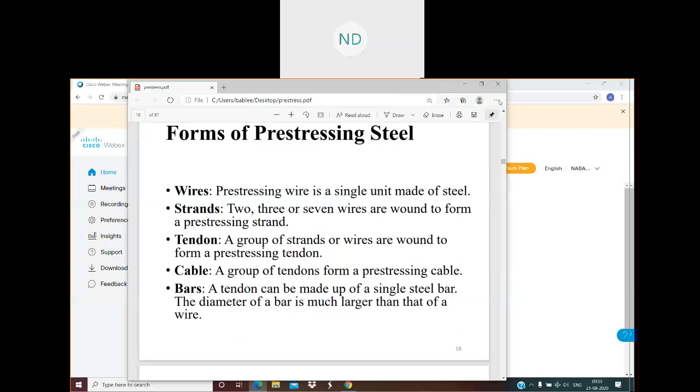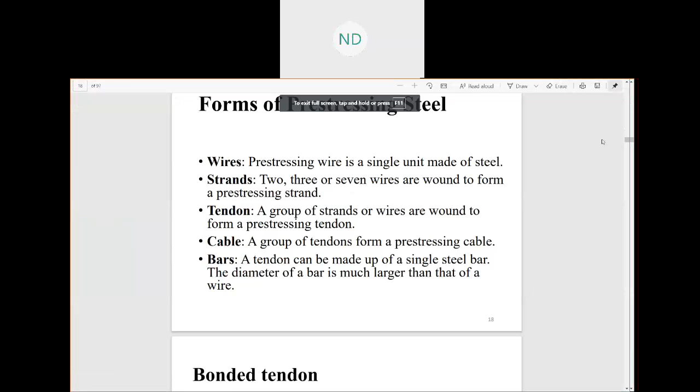So I think last class we have done with forms of pre-stressing steel, the tension, pre-tensioning, post-tensioning, tendons. Last thing we discussed was forms of pre-stressing steel, what are the tendons which we are going to use in our pre-stressing concrete, right? This we have discussed, forms of pre-stressing steel.

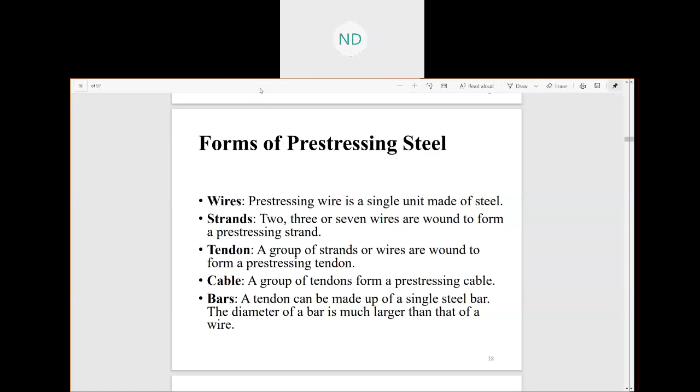Now, if we go to the advantages of pre-stressing, today we'll see what are the advantages of pre-stressing. Here it is mentioned sections remain uncracked under service loads.

As I told you in the last class, RCC structures - since concrete is weak in tension, at the bottom of the beam you will see cracks during service loads after the concrete has taken all the tensile stresses it could take, and furthermore could not take, since concrete is very much weak in tension. So we have seen cracks, but in pre-stressing, since they are very much strong, we use pre-stressing tendons and perform the pre-stressing process, so that they can have higher strength, especially in tension, so that they can carry more tension as well as compression. That's why sections remain uncracked under service loads in most cases.

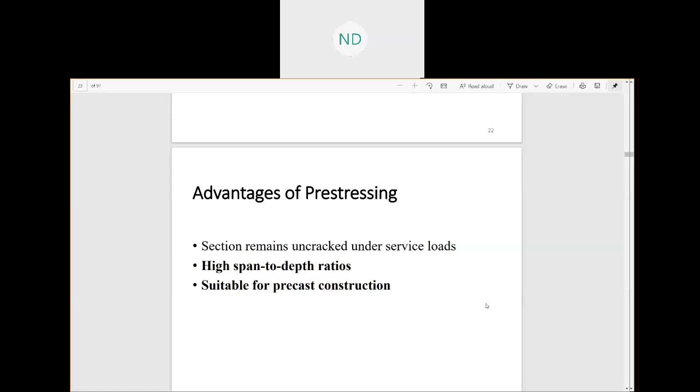Now if we come to the limitations of pre-stressing, what are the limitations? Pre-stressing needs skilled technology, because we are very much familiar with RCC, but not familiar with pre-stressing much here in India. Now it is done in some places wherever it is required, but it needs precision, and therefore we'll need skilled technologies, hence it is not as common as reinforced concrete. I think you people will understand if you go through this once.

The use of high strength materials is costly. In pre-stressing, the tendons used are very much high strength steels, so they are higher in cost compared to steel rods. Also, since in pre-stressing we use larger span to depth ratios...

So obviously when you're using pre-stressing, the amount of concrete used is more, your tendons used is more, and therefore your cost is higher, because the grade of concrete you use is also higher, since we are taking this pre-stressing method. Why? Because of the higher loads and higher span to depth ratio. So obviously the cost goes higher.

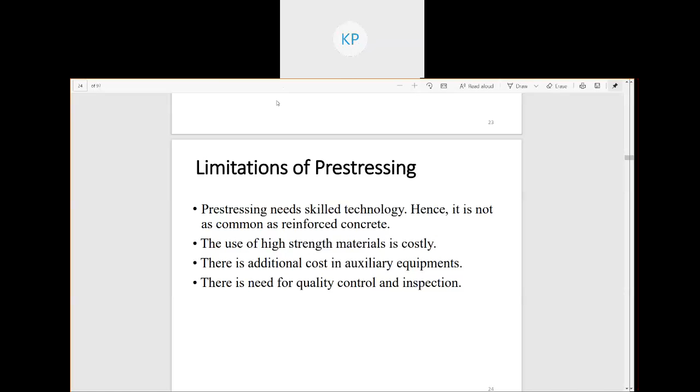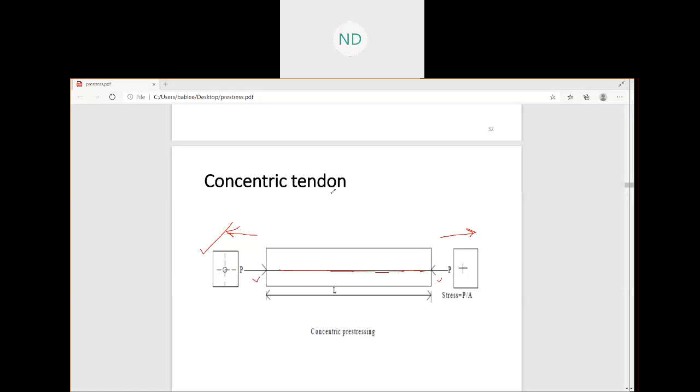On the left hand side make a column where you write pre-stressed concrete. On the right hand side make a column of reinforced concrete, RCC. One is pre-stressed concrete, one is reinforced concrete.

On the other hand, make a note - what do you think about the stresses generated in pre-stressing concrete, about the stresses in pre-stressing concrete versus RCC? If you think about RCC and pre-stressed concrete, what do you think about the stresses there? Anyone can comment, or you can speak also.

Anything about the stresses in pre-stressed concrete and RCC? No? Okay, then you write - in pre-stressing concrete, stress is almost constant. Okay, in pre-stressed, area is more. Yeah, area is more. But what about the stresses?

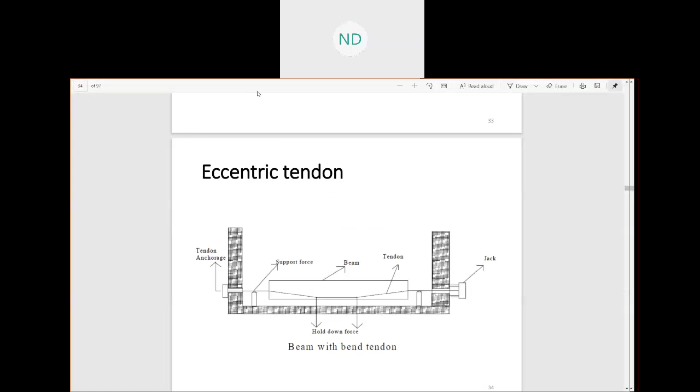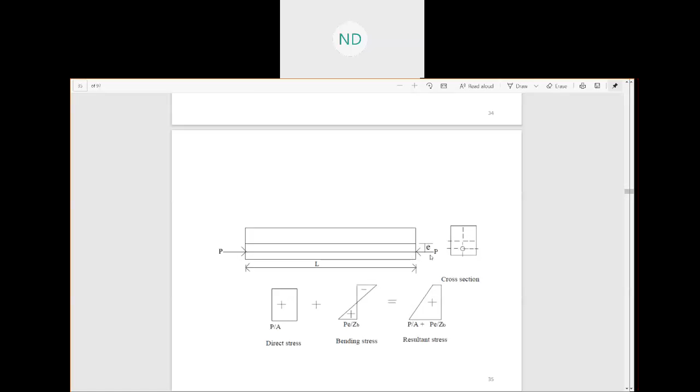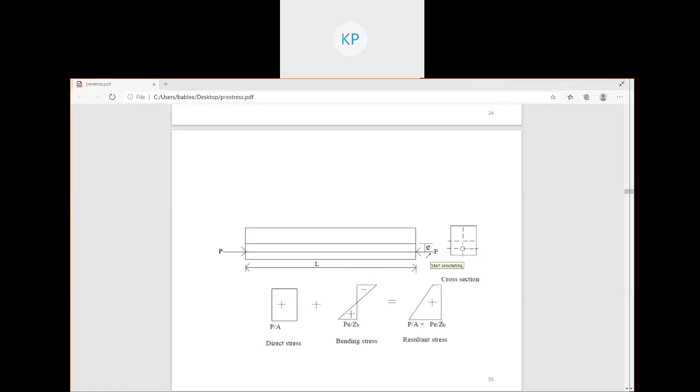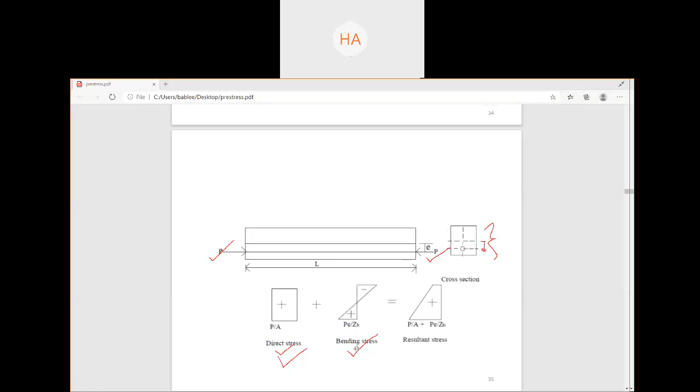Done, ma'am. Okay, next, number two, you write that in pre-stress concrete, it has more shear resistance.

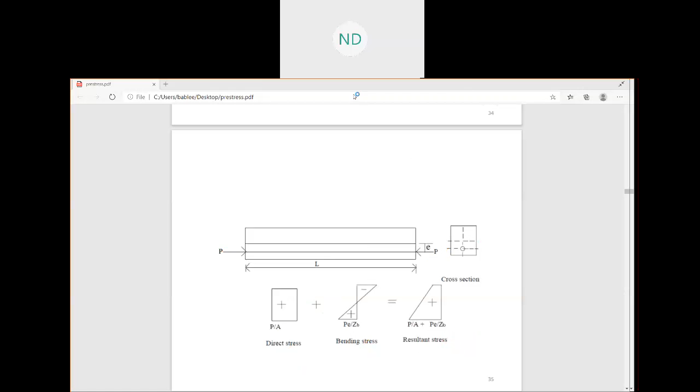So in RCC, you'll write it has less shear resistance. Obviously, the shear resistance will be more in pre-stressed concrete because it has higher strength tendons, and tension is also more. So the compression and tension is equally distributed in pre-stressed concrete. The shear resistance is more here in pre-stressing concrete.